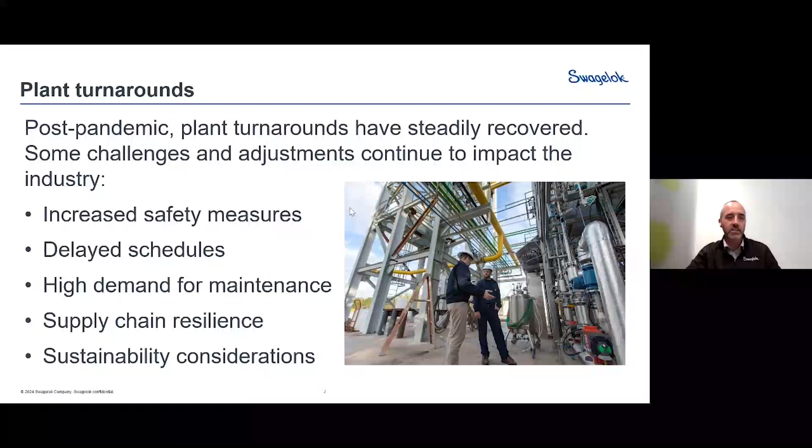I remember back in late 2020, somewhere around there, a lot of those fall turnarounds, I never thought I'd have to say this, but things like getting pipe nipples and welded construction of piping systems were really, really difficult because of obvious reasons. So overall, while post-COVID plant turnarounds are gradually recovering, challenges related to safety, workforce availability, and supply chain persist.

So here are some of the main challenges that we've observed when conducting some of these plant turnarounds. The first thing is workforce availability and health. COVID-19 impacted the health of the workers. This led to absenteeism and labor shortages, but not only that, the pandemic has caused a shortage of skilled workers in some regions. Travel restrictions and health concerns have also limited the availability of personnel for plant turnarounds over the past 2 years, and health and safety protocols have also necessitated reduced workforce capacity, affecting turnaround schedules.

We can't deny that the economic fallout from the pandemic strained finances for many companies. The budget cuts reduced capital availability, and cost consciousness may hinder investment in plant turnaround projects. There's a constant trade-off amongst priorities, cost, and schedule in every plant turnaround planning.

Plant safety and environmental considerations are becoming a critical factor, not just on turnarounds, but everywhere, right? Operators now incorporate stricter safety protocols to prevent the spread of COVID and ensure the well-being of workers. This includes things like regular testing, enhanced hygiene practices, social distancing, and not only that, but companies are also focused on energy efficiency, waste reduction, and emissions control during maintenance activities to align with these regulations. And this is mainly meant to meet sustainability targets. The next one would be reduced operational activities during the pandemic resulted in a backlog of maintenance activities, right?

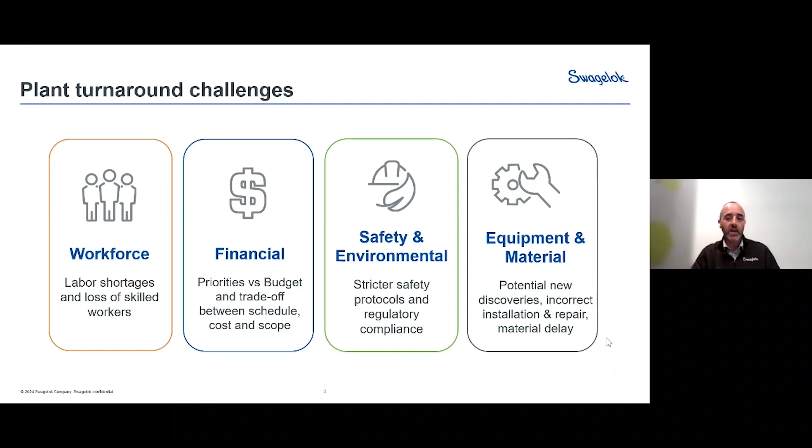So Swagelok understands that every turnaround can be conducted in a safe and timely manner with a peace of mind that the unit and the plant will start up smoothly. Safety is paramount, right? We all know that that's the most important thing. And turnarounds shall be executed with rigorous procedures to protect the well-being of the workers in the plant. And time is of the essence, and a quick, efficient turnaround minimizes downtime and saves costs. Maintaining a strict focus on quality prevents startup delays and ensures plant startup in a reliable manner.

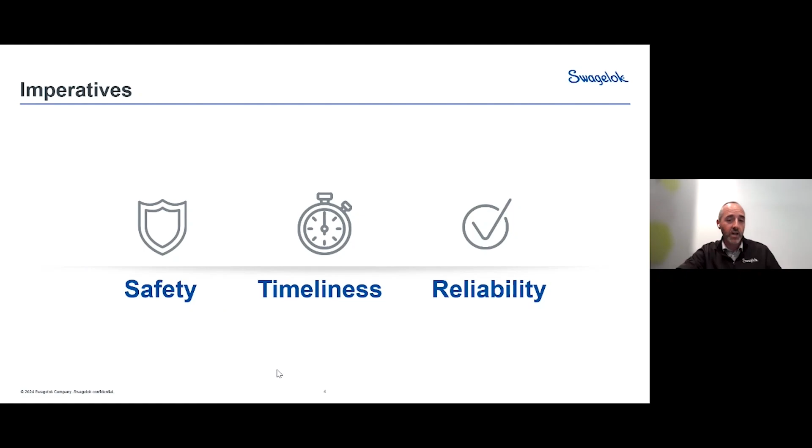So we would like to share 7 tips for successful plant turnarounds. These are some things you can start doing today, right? So don't waste any time and implement these right away. So the first is engage early with trusted partners. I would say, pre-COVID, this was something where maybe you were focused on the large equipment, but really there needs to be an added emphasis on some of the smaller components as well. We'll get into that a little bit.

So as a very basic overview, planning for turnarounds is an extensive process. It often begins years before the work itself starts, and for good reasons, right? Being as prepared as possible helps eliminate unforeseen project pitfalls. And so a lot of you that are involved in project planning, you may put items into a folder, and then that folder may sit on a shelf for a few years until it gets green lit, right? So, significant plant shutdowns are carried out swiftly, but with a high level of intensity in their execution. And they can consume an equivalent cost of a yearly maintenance budget in 4 to 5 weeks.

One quality of well-prepared projects is the owner's early engagement with critical parts and service suppliers. Many fluid systems are complex entities. Some require specialized parts and highly specific alloy materials depending on the process. For example, you may require exotic alloys such as Monel in an alkylation unit in a refinery, or 6 moly parts in an offshore platform. Lead times for these engineered-to-order parts are typically longer, so engaging with your suppliers early is always a good idea, especially on those exotic alloys. A longer term overview allows for operations to make decisions on the plant turnaround schedule to gain the best output.

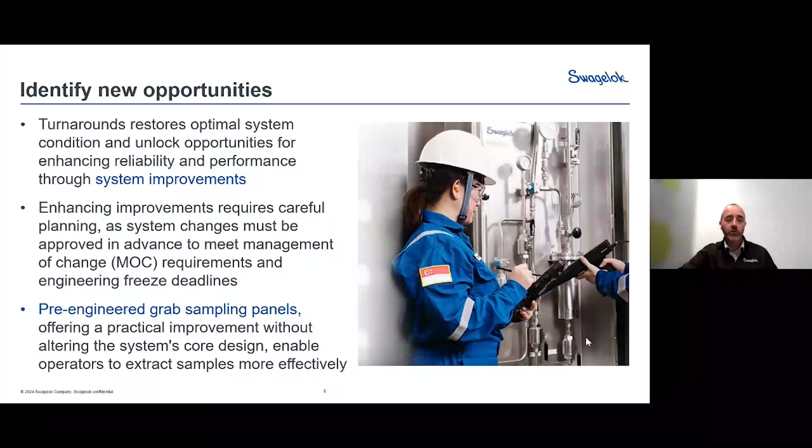The next would be prepare for the unexpected. And what this basically means is you need to be making allowances for variables and contingencies throughout the turnaround. And this can ensure overall project efficiency beyond just that critical path that sometimes consumes these types of projects.

For example, due to the large and complex nature of the fluid systems throughout chemical plants and refineries, it's practically impossible to know which and how many specific components will be needed throughout the TAR. TAR is short for turnaround, right? And for that reason, it's beneficial to stock a variety of hoses, valves, and adapters prior to the start of the project. So having some of these basic components already on hand can be a significant time saver versus having to order additional parts once installation is well underway.

And this also makes perfect sense from a cost standpoint, right? Because if you need additional components, now it's all hands on deck. You get things like expedite fees and shipping costs and things like that. So of course, no operator wants to be stuck with unused inventory. And for that reason, sometimes it's beneficial to seek out terms with suppliers, allowing you to stock temporary or consignment inventory.

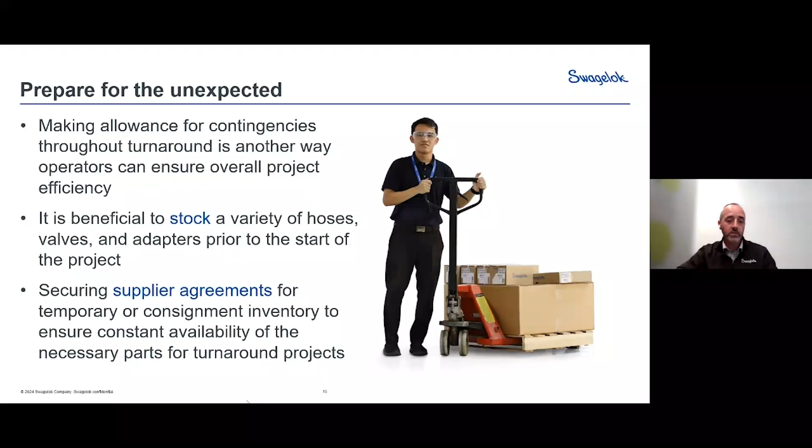The next is get local support. Sometimes the unexpected is going to happen. It happens during every turnaround project. I've never been involved with one that goes completely smooth without surprises. And you may not have the right parts on hand at the time when you need them. When you're coordinating with your vendors, ensure that they can offer localized support near your project for any unforeseen part sourcing that may occur to ensure timely delivery.

Not only that, but it's also beneficial to have local field engineers on standby to help prioritize the implementation of solutions and supervise the installations as needed, right? We talked about some of those prefabricated assemblies that can help. It's also good to have someone on site to help show you where these things should be hooked up to make sure they're perfect. Operators should select local specialists that are backed by a global team of experts to ensure that no time is lost in any plant turnaround.

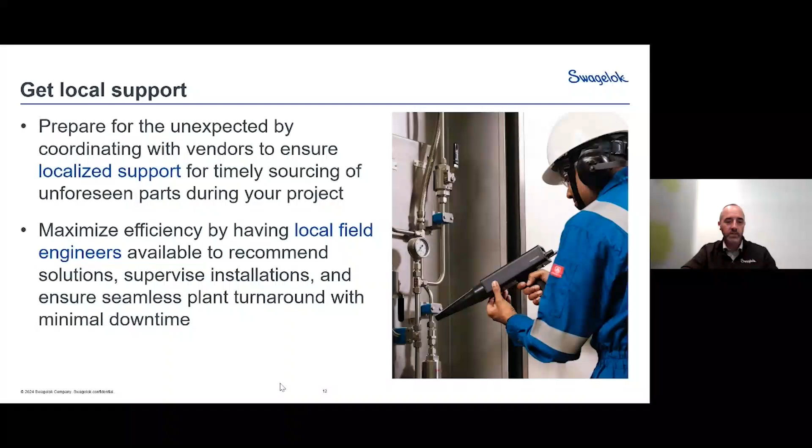The next is going to be on critical parts installation. Right, so the number of technicians working on each turnaround can be staggering, right? Hundreds or thousands of laborers from different firms and disciplines, oftentimes from around the world. As such, the level of installation knowledge across numerous vendors is often inconsistent. Inconsistency is the last thing any owner wants on a turnaround project.

For example, poorly routed tubes might be at risk of vibration fatigue, and an inexperienced technician may not consider the right tools or equipment for the work. Installing these parts without the right tool or equipment can be potentially damaging to components and lead to poor performance later on.

Now, how do you ensure consistent installation across dozens of different contractors? One strategy is to include training and certification with your specification. This ensures that anyone performing the work on your system is equipped with certain baseline knowledge and is familiar with sound installation best practices.

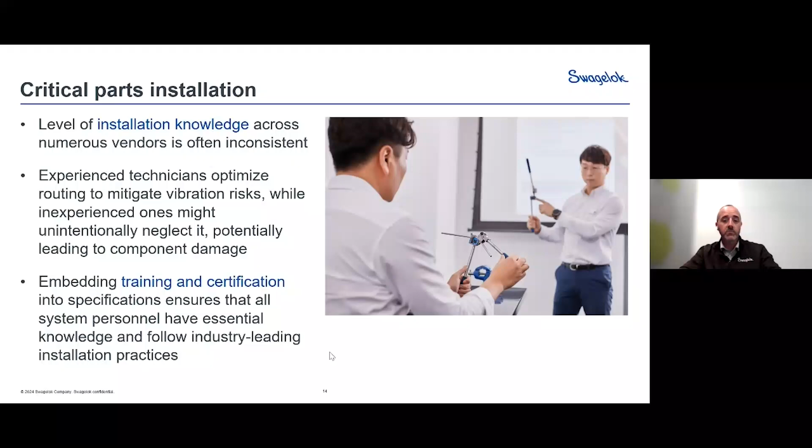The sixth tip we have is to seek out prefabricated assemblies. We mentioned this a little bit earlier on, but things are becoming more and more complex, and there are more and more pressures to increase safety, efficiency, and ensure environmental edicts are met. And because of this complexity in many systems in chemical plants and refineries, the more they can be prefabricated, assembled, and tested prior to the turnaround, the more efficiently contractors can install these critical systems and reduce error.

Prefabricated assemblies can once again help alleviate expertise, knowledge, and consistency concerns across numerous vendors and contractors, and can free up labor hours. Starting with proven standard designs, highly trained and experienced professionals operating with a local specialist will configure fluid system assemblies to meet operators' needs. Grab sampling panels are one good area of opportunity. This allows for safe, efficient sample capturing while meeting your specific plant needs.

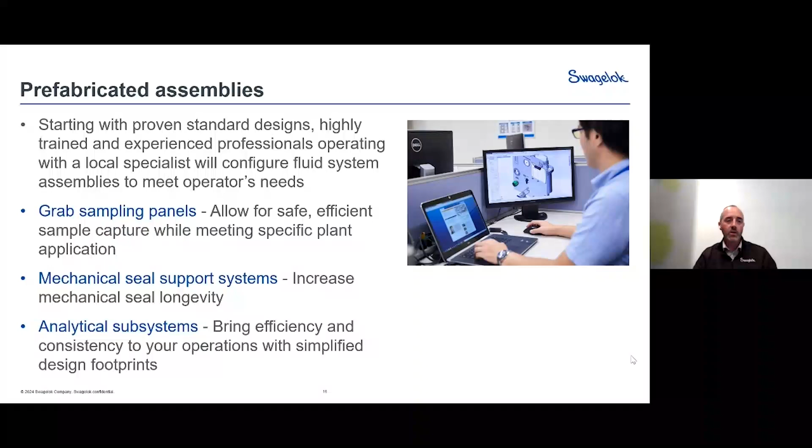Elsewhere, mechanical seal support systems can help increase the mechanical seal lifespan. And finally, analytical subsystems, including fast loops, field stations, calibration and switching modules, sample probes, and fluid distribution headers, can bring efficiency and consistency to your operations with simplified design footprints.

The last is maintaining quality control. And sometimes when we talk about quality control, we think about pieces and parts, but really we're talking about much more than that. So through the lens of quality control, it's always in the operation's best interest to maintain strict control of quality and consistency of the parts being installed during a turnaround.

Specifications that allow too much flexibility may lead some contractors to source less expensive and lower quality components. Inconsistent parts quality across different systems can lead to inconsistent performance, premature maintenance needs, or downtime later on. And keeping a tight, up-to-date specification that allows only for the use of high-quality components in your fluid systems is one way to make turnarounds effective and also increase that envelope of forgiveness that you have if an installation goes faulty.

So therefore, it's beneficial for operations to launch a capability building program to augment the technical team skills through trainings and hirings. A vendor that can train the team to better understand sampling systems, increase the consistency and quality of fluid system installation, and learn how to recognize and solve sampling issues itself, can be a partner to you to develop skilled technical teams for the operators' organizations.

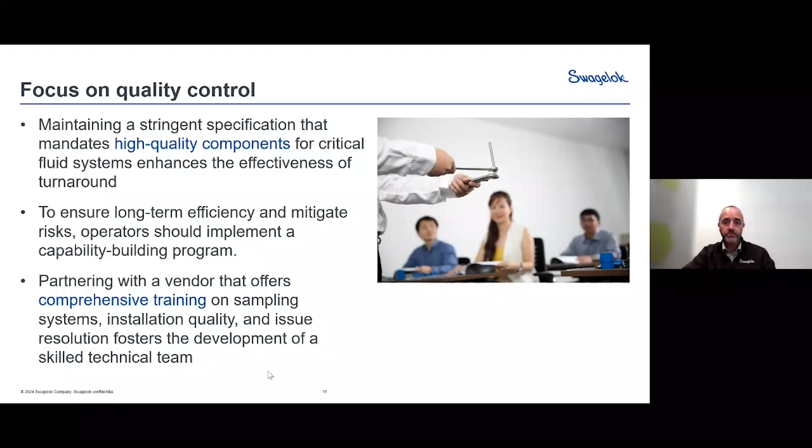So once again, here we list the 7 effective ways that you can help overcome the turnaround hurdles and ensure an efficient, safe execution of plant turnarounds. Early engagement, identify new opportunities for system improvements, prepare for the unexpected, ensure availability of local support, keep a close eye on installation of critical parts, seek out prefabricated assemblies, and maintain tight quality control of fluid system components are some of the ways to overcome plant turnaround challenges.

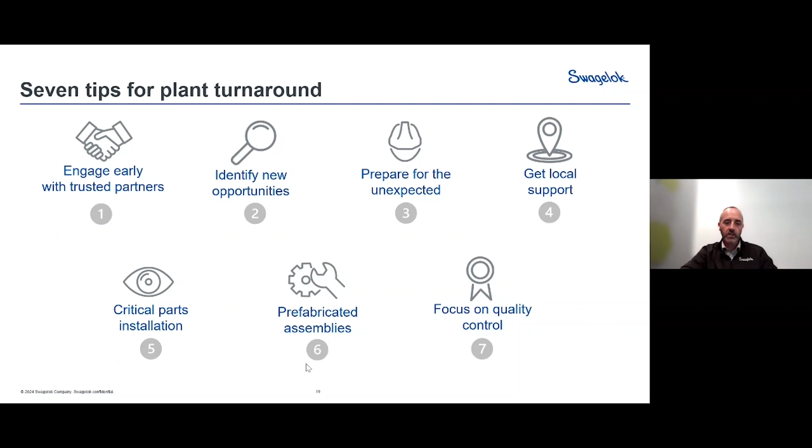One of the last things I want to leave you with are 2 specific case studies where Swagelok has actually supported our customers in the region in their plant turnaround. The first case is on system improvement performance. Swagelok has supported a major oil company to improve their system performance. The owner originally used mobile skids and trolleys to inject nitrogen into the equipment during shutdown and startup. As part of the system improvement, they were looking for a permanent solution, and Swagelok deployed a solution where our team of engineers conducted flow calculations, tube sizing, and fabricated a system to meet the customer's requirements.

The application requires nitrogen for blanketing. And for those of you that are not familiar with blanketing, blanketing is a way in which to control the environment of the product that you are storing inside of a tank or container. And it also aids in the cooling of the reactors of the systems, in this case. The instrument air has high flow rates, therefore tube size is critical in this application. As a result of the system installation, the owner saved 2 to 3 days worth of reprocessing, which amounted to several hundreds of thousands of dollars saved during the plant turnaround.

The second case is around Swagelok services. Swagelok field engineers conducted a hose advisory service to identify the proper hose length and installation best practices during control valve overhaul in a plant turnaround. The owner, a leading petrochemical company, trusted Swagelok's advice and recommended solutions to help eliminate leaks on instrument air control valves during the plant startup.

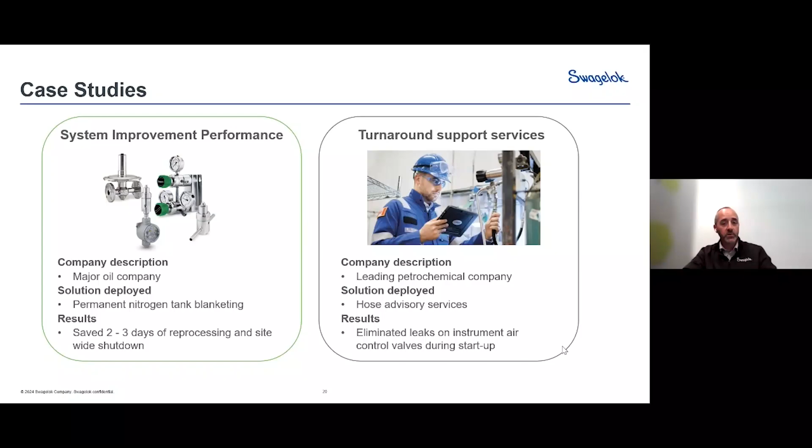Our qualified trainers conducted training to support the health of the system and the operations team that were there to maintain it. Swagelok's early engagement with the client coupled with the advisory service during the job scoping has benefited them in starting up the plant in a safe and efficient manner. So these are just 2 examples of hundreds out there where we have found ways to support the turnaround efforts on site in their plant turnarounds to help increase efficiency and save your facilities some money.

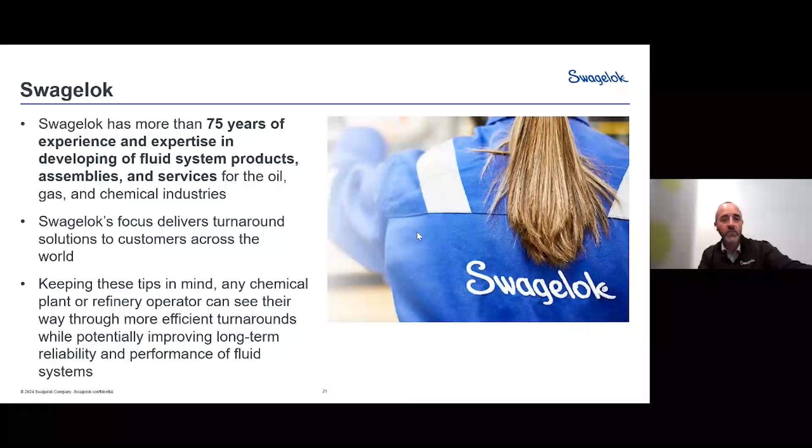First one here: what are some common opportunities that customers are often neglecting when they're planning for their turnarounds?

I mentioned it a little at the beginning where we talked about the critical path of projects, and critical paths tend to deal a lot with people and major assets. For example, if you're having a heat exchanger turnaround where you're pulling one out of service, a lot of times there's a lot of concentration on the heat exchanger itself and the critical path of getting that replacement or service in. The little things, the nuts and bolts, tend to get ignored, and sometimes those can be the biggest problems. So one of my favorites is steam tracing, also referred to as winterization. Those tubes, valves, steam manifolds, and condensate manifolds tend to get ignored, seen as just a commoditized component of the project that may have an estimate of days associated with it.

That's really one of those areas that post-COVID has become more and more important, because that also has its own supply chain counted within. So you can reach out to vendors that can actually help plan that component of your project, and not add extra work on your end, but make that go just as smoothly as everything else.